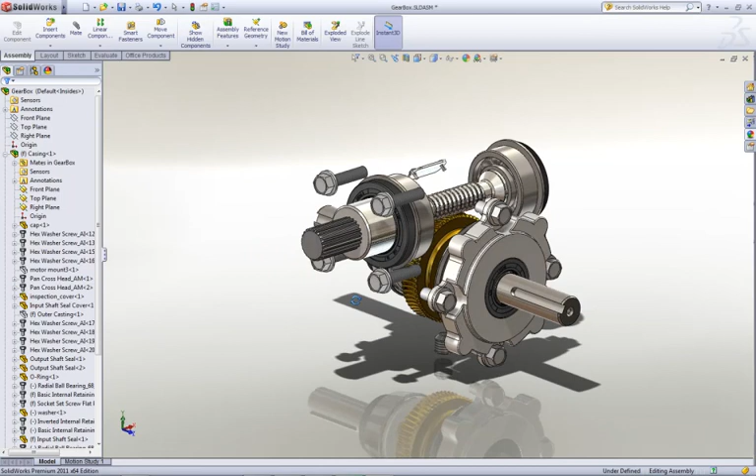Suppliers want their customers to take advantage of their designs as much as possible. However, there's a lot of detail in their products that they don't necessarily want to share for proprietary reasons, but also more importantly because most customers don't really need that level of detail. All they're concerned about is being able to take their design and fit it in and make sure it's going to connect up and work correctly.

To help out on this front, we've added a great new tool in SolidWorks 2011 called Defeature. It's a wizard-like interface that helps us very easily go through and automatically clean up the models, whether it's based on just removing a subset of items smaller than a certain percentage, selecting specific components, or just telling it to remove everything that's internal to the model. With a couple of clicks, you can very quickly and efficiently clean up the design.

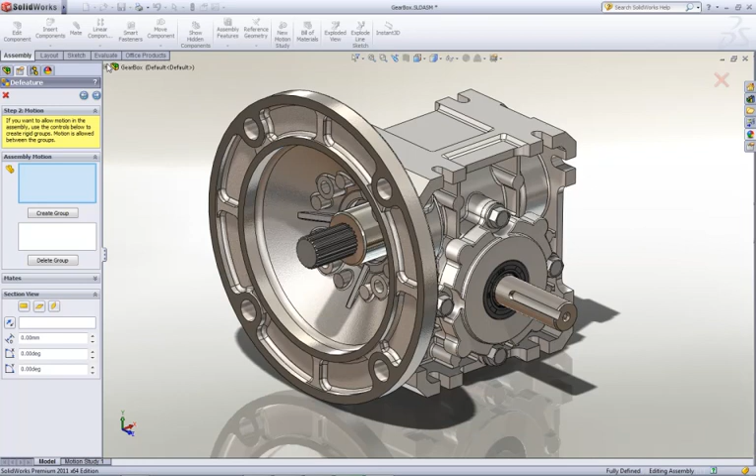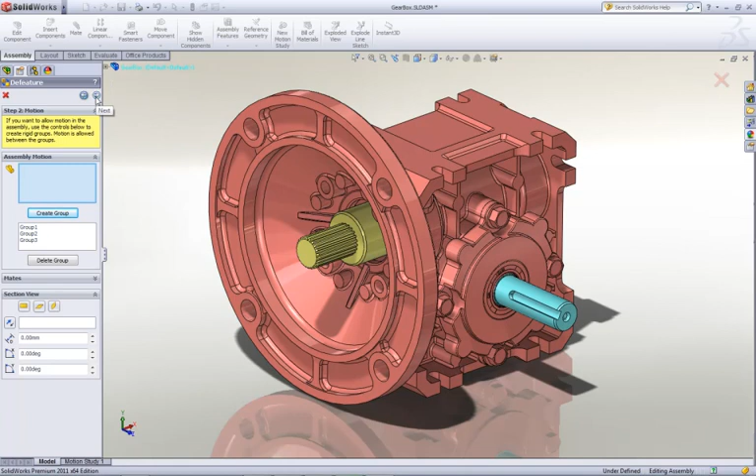What's more important with Defeature is you actually have the ability to include the design intent, and we can do this by supporting the motion of the system. For example, this is a gearbox, so we can come in and create groups of components, and the mates between these groups will be preserved. That's a very powerful tool to ensure you've got not only the appearance and features, but also the function of the design.

Now we can also preserve particular features, such as those associated with the mates, or for example, because this is going to be mounted, we want to preserve these mounting holes, and maybe we want to preserve this internal cutout as well, just to make it a bit easier to see the shaft.

Defeature then goes through, cleans up the models, fills in any interior volumes, as well as ensures that those features that we've selected are preserved.

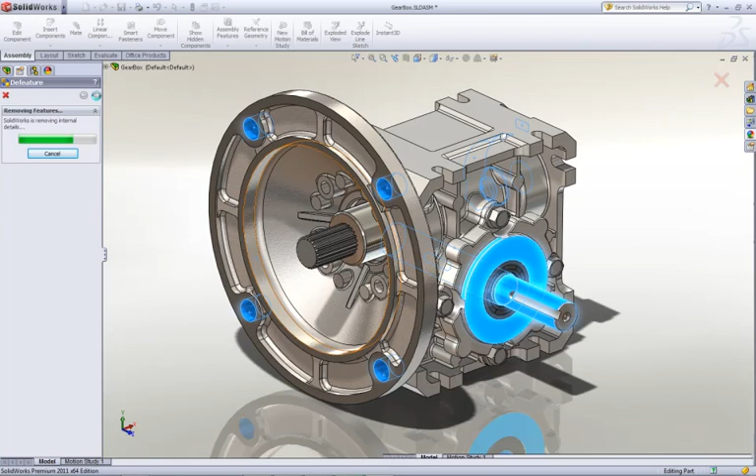Once it's completed that task, we get a side-by-side comparison to look inside the models, so we can easily see what features have been removed and cleaned up. If we do a section cut through the model, that also will just reinforce how it's filled in all that internal detail and that other geometry has been removed automatically.

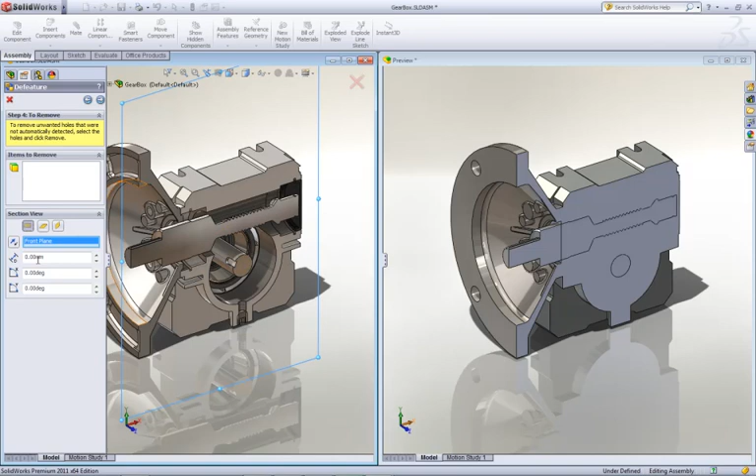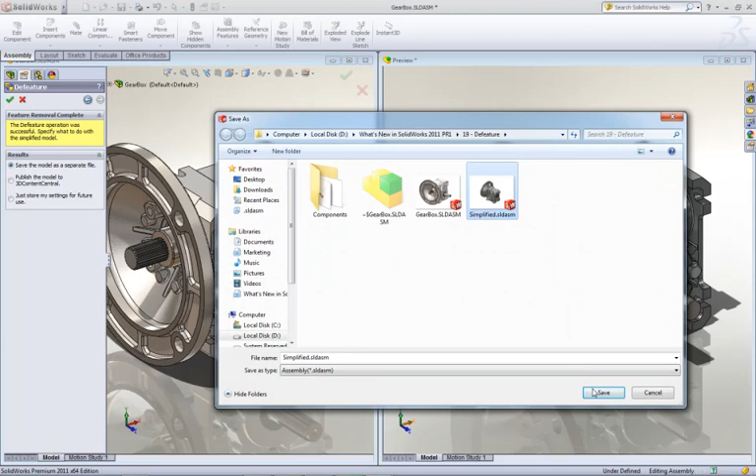When we're ready, we can either just save the settings we've set up now to defeature the model, and what we're doing is we're creating a separate file, so we can save just directly to that separate file, or if we're happy with our output, we can directly upload it to 3D Content Central. And because it's completely parametric, we can always come back and change things at a later date. So let's take a look at the simplified design.

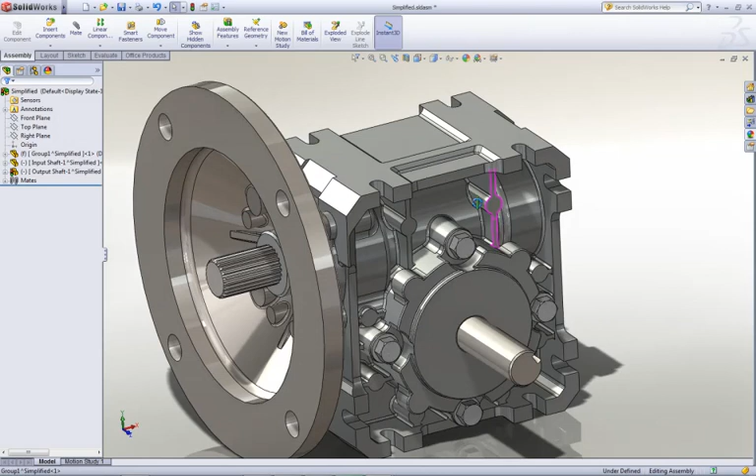So here's our system, and you can see we have our components, and there our mates are preserved. So if we spin the shaft, the other shaft moves proportionally based on the gear ratio, which is about 50 or 60 to 1. So like we said, we've got the appearance, we've got the features we need to be able to put it into our system, as well as the function in terms of the operation, which is incredibly powerful and something that's unique to SolidWorks.

Now, as I mentioned, it's a parametric feature, so if you come back in here at any stage, you can easily go and modify any of the settings you want to update those accordingly. So Defeature's a great little tool for helping suppliers clean up their data quickly and efficiently to share with customers with very little overhead.

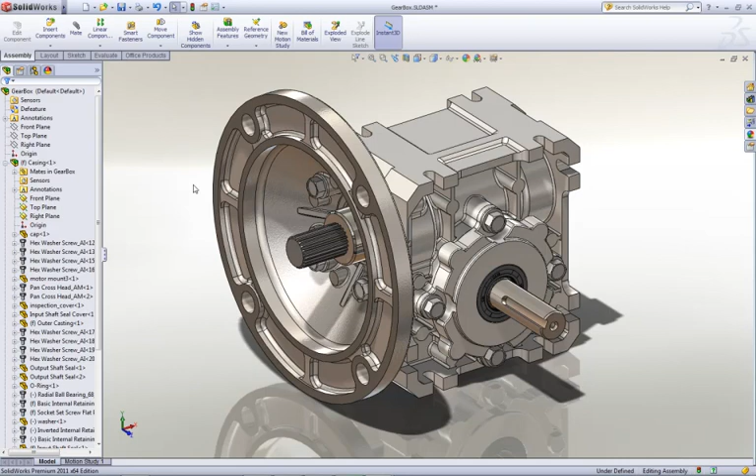Now, if someone's looking at some of the information here, for example, like this shaft, you'll see that it's got quite a bit of complex detail with the screw thread. Again, SolidWorks is a very powerful tool to help us clean up geometry. I can select all those faces and very quickly remove them.

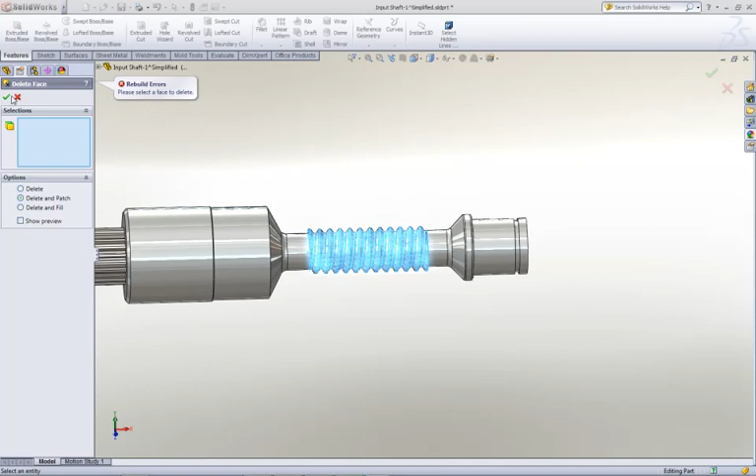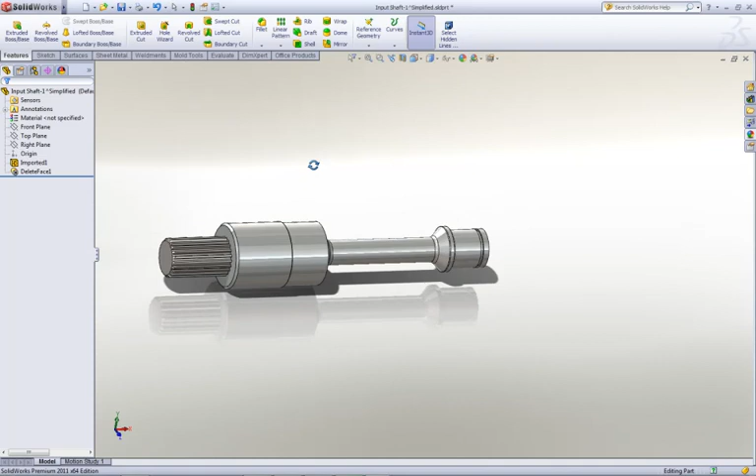I can come in here and clean up that geometry very easily using the delete face tool. All I do is select these faces, and just like that we have cleaned up geometry. So again, it's very easy to come in and not only simplify a complex system, but also clean it up if you need to on a one-on-one basis.